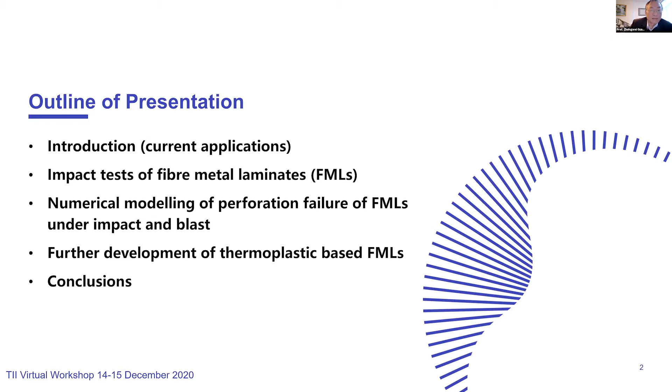So what I'm going to talk about today is the dynamic response of fiber metal laminates subject to extreme loading conditions. First, the outline of my talk: I will give a very brief introduction and include the current applications of fiber metal laminates. Then we'll talk about impact tests. Later, of course, the modeling; I will cover both impact and the blast response of fiber metal laminates. And then a little bit of further development of thermoplastic-based fiber metal laminates. Finally, draw a few conclusions.

Uncertainties nowadays is kind of a buzzword. We have a lot of uncertainties in the current world. We don't know when and where accidents, natural disasters, terrorist attacks will happen. So what we can do is design and manufacture blast and impact resistant materials and structures, and place them in some key locations to protect lives and protect the infrastructure.

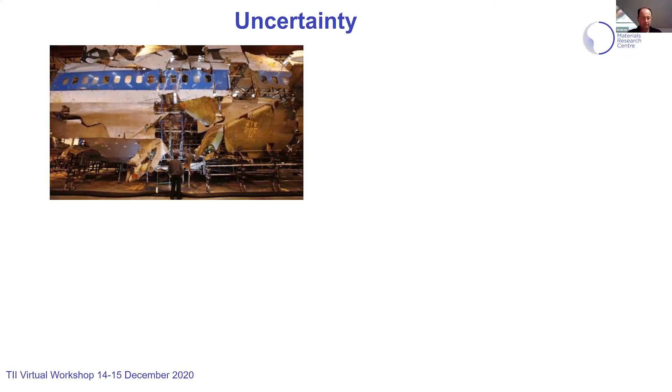So here I show an aircraft back in '88, I think in Scotland. The bomb actually detonated inside the luggage container, which made it crash and killed all people on board and also about 11 people on the ground. So if we can design a luggage container to resist possible explosion, we can actually prevent this kind of disaster. This is a fiber metal laminate luggage container after a blast test. As you can see, it survived.

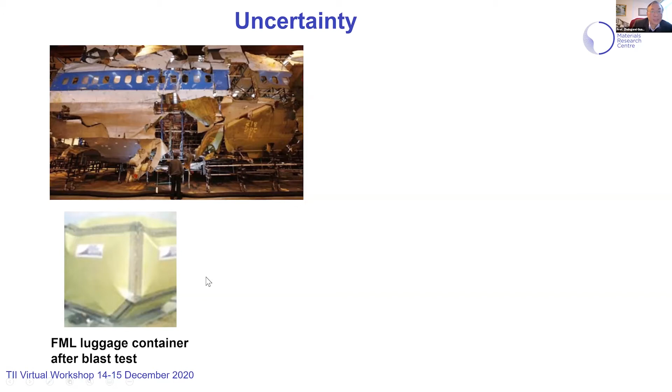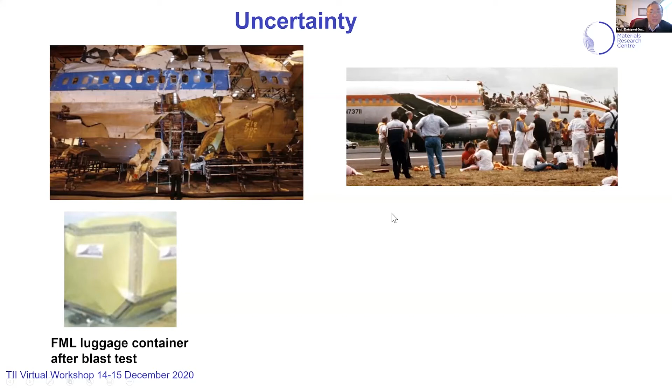And this is a part of fuselage being ripped off during flight. Fortunately, the aircraft landed safely without any major injury. And also this air blast; again, the aircraft survived. But in those key locations we may experience this kind of incident, so we could place impact and blast resistant materials to avoid loss of life and damage to aircraft. This one shows the aircraft wing using fiber metal laminates, so we can have very good impact resistance.

To develop impact and blast resistant materials and structures, usually we do experimental work, and also numerical modeling. Numerical modeling nowadays is very powerful, so we can reduce the number of tests and do a lot of numerical modeling. Once the modeling is validated against the test results, we can use the model to help our design.

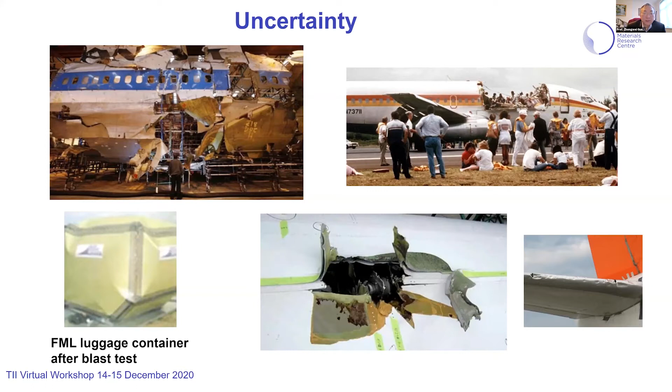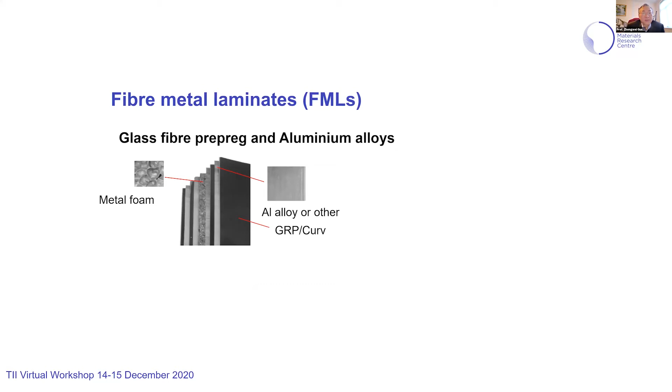So what is fiber metal laminates? It's composite and metal with a certain stacking sequence. For example, here we have two aluminium layers outside, and the middle is a composite layer. This is called 2-1, and then 3-2, with three metal layers and two composite layers, and 4-3. For the composite we can have glass fiber, Kevlar, and carbon fibers, and for the alloys we can have aluminium, steel, titanium. It depends where we're going to use it, but at the moment mainly aluminium is used for aircraft.

Major advantages of fiber metal laminates are very high impact and blast resistance, long fatigue life, good corrosion and fire resistance, and a very low weight to strength ratio. That's why we use fiber metal laminates for aircraft. And the flexible stacking sequence, so we can have different constituent materials and different geometry, mainly the thickness.

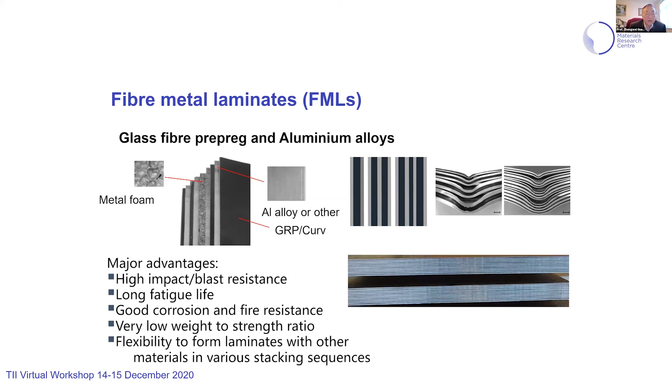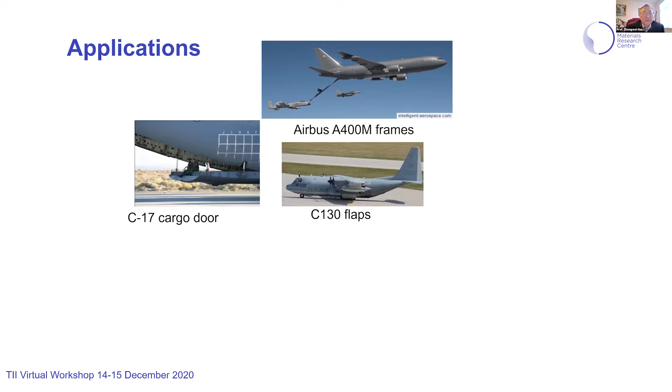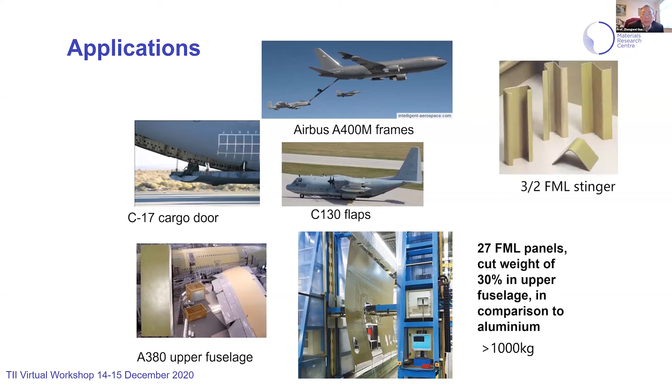Applications. Here I show the C-17 cargo door made from fiber metal laminates; you can imagine the military vehicles drive up and down, so you need very good fatigue resistance and impact resistance. Airbus A400M frames were made from fiber metal laminates, and C-130 flaps. And this is the A380, the largest passenger aircraft in the world. The upper fuselage was made from fiber metal laminates: 27 panels, which cut weight by 30% in the upper fuselage compared to pure aluminium alloys, greater than 1 ton. This is a 3-2 FML stringer.

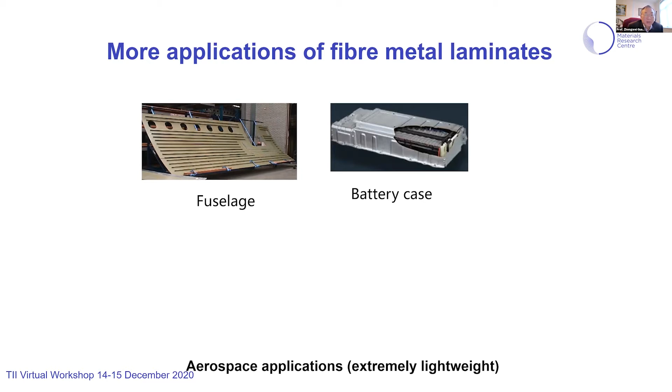Now, fuselage: we use fiber metal laminates. Nowadays Airbus narrow body aircraft use fiber metal laminates. And battery case, mainly for electric car battery cases, we need very good impact protection. I know some company in the UK tries to use fiber metal laminates, and has probably already produced some battery cases. People also use titanium carbon fiber or titanium Kevlar fiber to make fiber metal laminates to protect satellites.

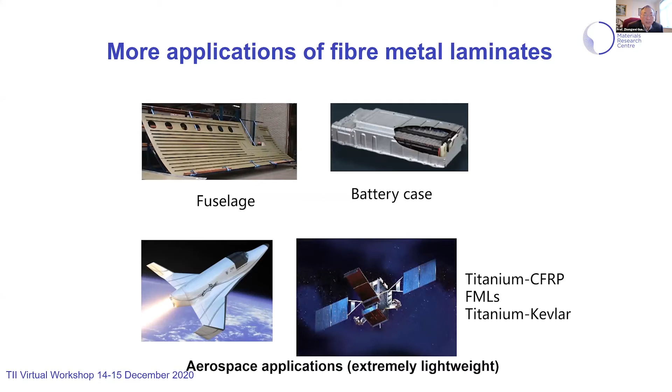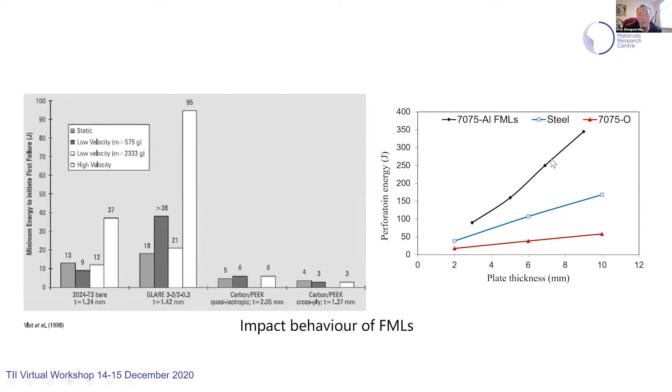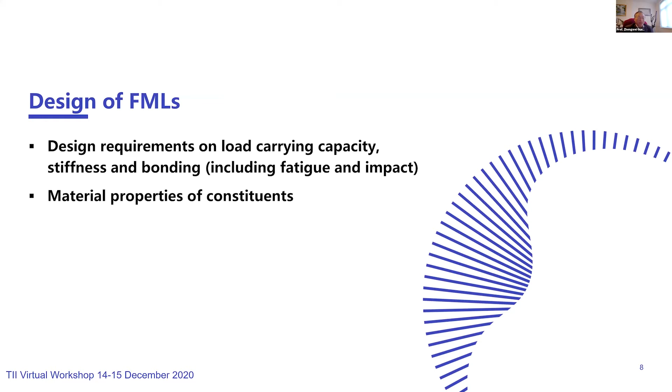Design of fiber metal laminates, of course, has to satisfy load capacity, stiffness, and bonding. This includes fatigue and impact, and the material properties of the constituent materials. You need to design what you are going to use: aluminium alloys, titanium, or for some ground applications steel, and also what kind of fiber reinforced plastic, carbon fiber, Kevlar, or glass fiber.

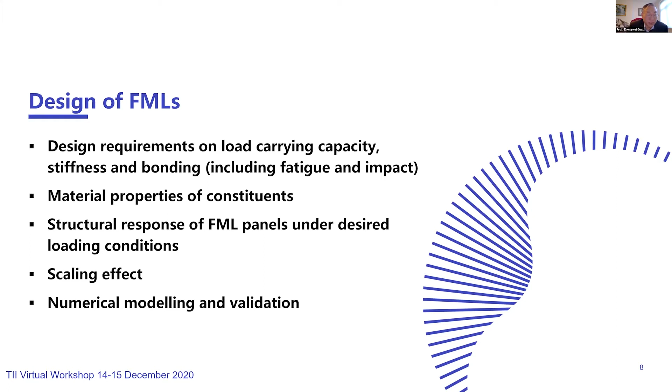Structural response, of course, you have to design under desired loading conditions, and the scaling effect, which Professor Cantwell talked about in detail yesterday, and numerical modeling and validation. This is quite important. Nowadays we have very powerful computers, so we can make use of this power to do a lot of parametric studies to help design. That's why I talk about using a validated model to assist the design of fiber metal laminates.

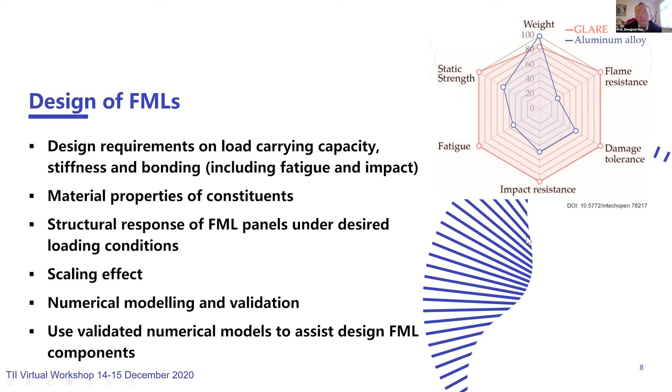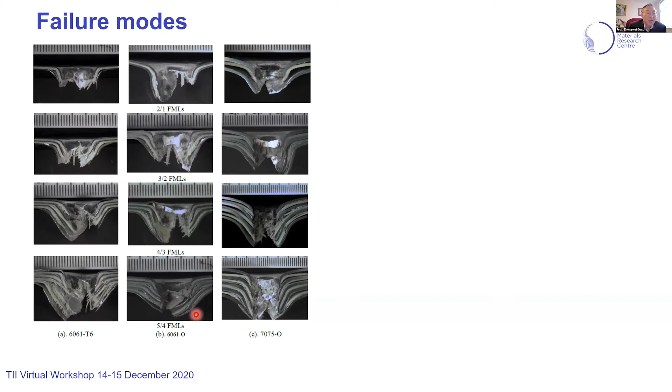Now I am going to talk about some test results. These are different fiber metal laminates: 2/1, 3/2, 4/3, 5/4, and 3 different aluminium alloys. They have similar failure modes. This is projectile impact with different stacking sequences. The primary feature is delamination between the metal layers and the composite layers, and we have cracks, of course. This shows the front face and back face of 3/2 fiber metal laminates, and also 5/4 configurations.

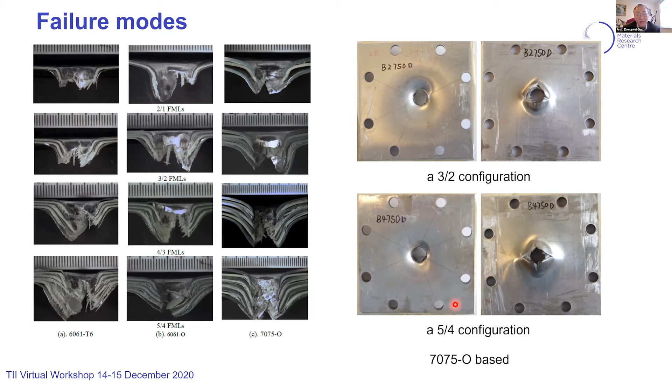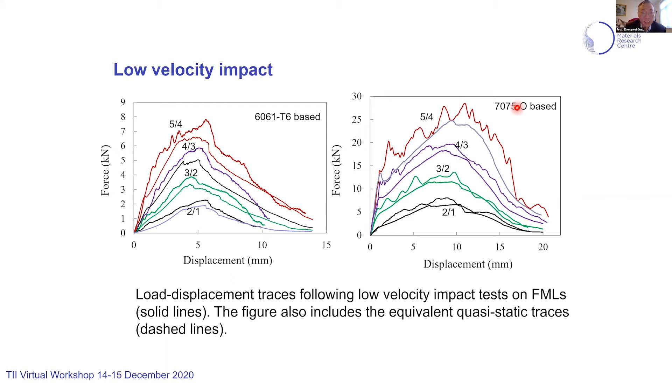This is high velocity impact, close to 100 meters per second. We have DIC recording the back face displacement field at different times. We can see the impact event starts, reaches a peak, and then bounces back. This one is not fully perforated.

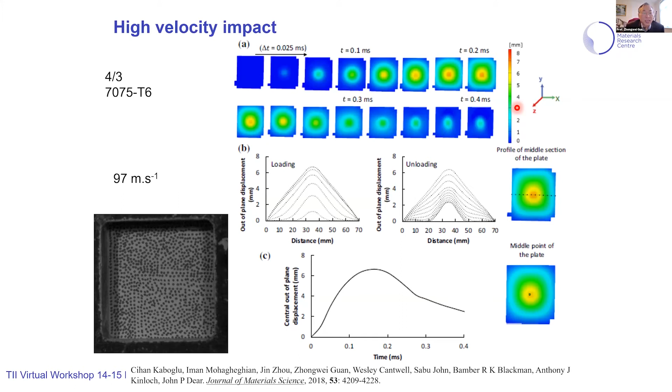Now I'm going to talk a little bit about titanium-based fiber metal laminates. We have surface treatment using a laser. Titanium surface treatment is quite important. You cannot use standard blasting or even chemical etching; that's not good enough. So here we use different laser fluences, 1 to 5. Number 3, with a laser fluence of 4.54 joules per square centimeter, gives us the highest shear strength, so the highest bonding, and this is the roughness.

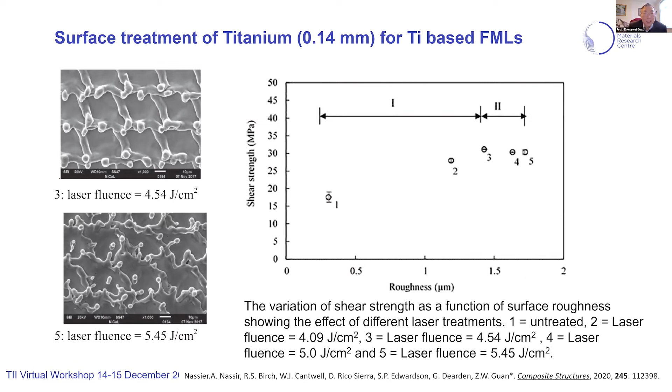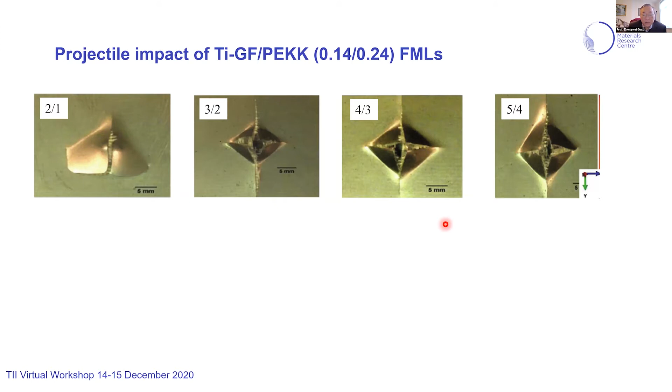These are the test results. The back face from 2/1 to 5/4 shows pretty similar failure modes, but of course different thickness. This is load displacement for the 4 fiber metal laminates: from the beginning it reaches the peak and then perforation starts, and the projectile perforates gradually to full perforation. And this is the perforation energy against the different stacking sequences from 2/1 to 5/4.

And this is a comparison between aluminium-based and titanium-based fiber metal laminates. The specific energy absorption is just perforation energy divided by areal density. We can see aluminium-based fiber metal laminates have higher specific energy absorption. The reason behind this, of course, is that aluminium alloys have much higher ductility, and titanium is relatively brittle.

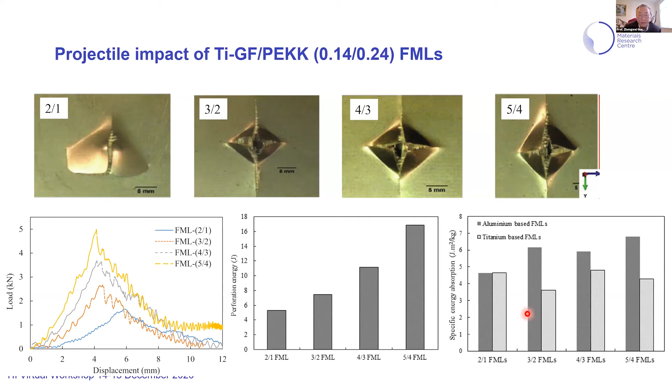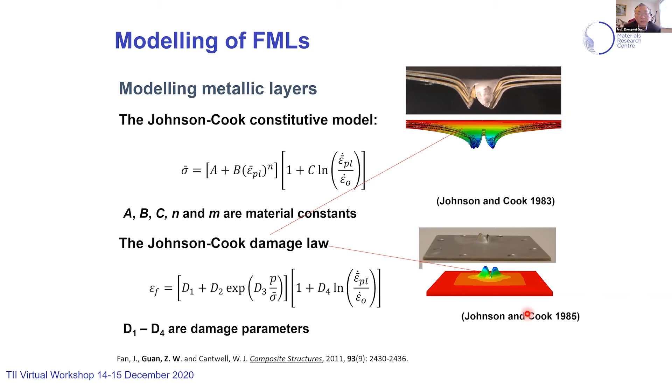Now I'm going to talk about the modeling. So for modeling fiber metal laminates, we have to model individual constituent materials. To model aluminum layers or metallic layers is very simple. You just use a Johnson-Cook constitutive model and the damage law, so I don't need to spend much time talking about that. Mainly I will talk a little bit more about the modeling of composite laminates.

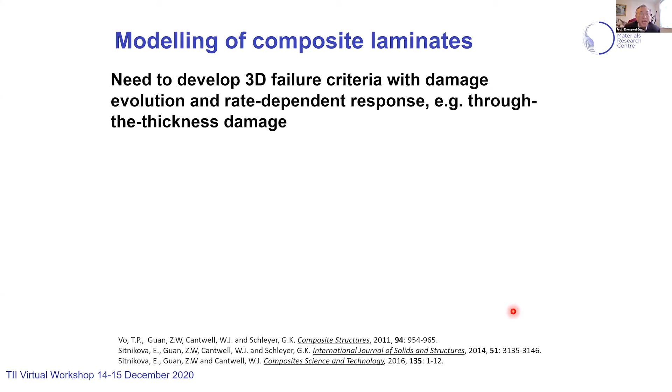In commercial code, you have 2D Hashin criteria. And if you use LS-DYNA, you may have 3D failure criteria, but they don't have control over the damage evolution or rate dependence. So we have to develop a user-defined subroutine. Especially for impact and blast, through-the-thickness damage is very important.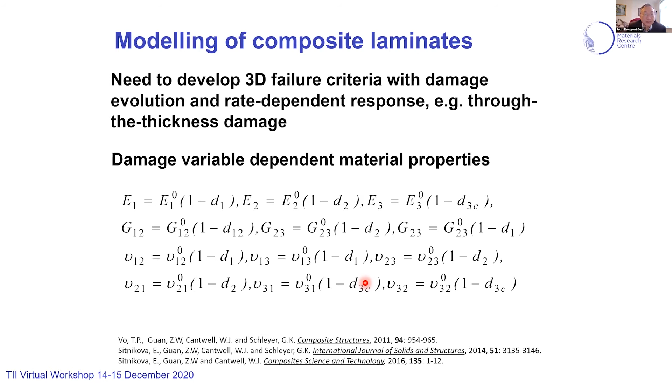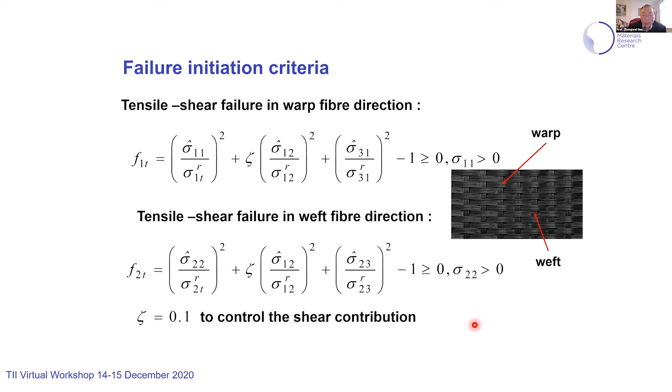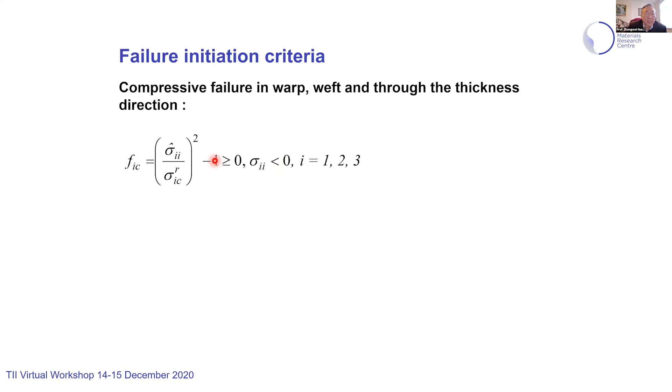This failure criteria covers tensile and shear failure in the warp direction and also in the weft direction. That is a typical woven composite. We use this damage criteria through the warp, weft, and thickness directions. So that's the failure criteria we use.

And this is strain rate dependency. Here we have sigma superscript S, that is the quasi-static strength. Inside the brackets, we have some enhancement due to strain rate. The reference strain rate is 1 per second, but the current strain rate from impact or blast is variable. You can have maybe 100 per second to tens of thousands per second. So you can see this is quite a large enhancement. If you don't consider rate dependence, you wouldn't be able to simulate especially blast response.

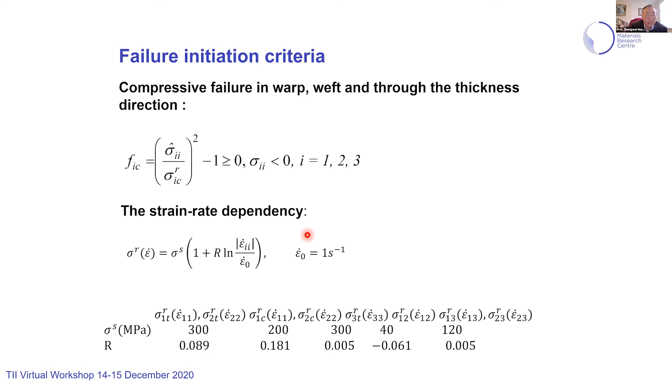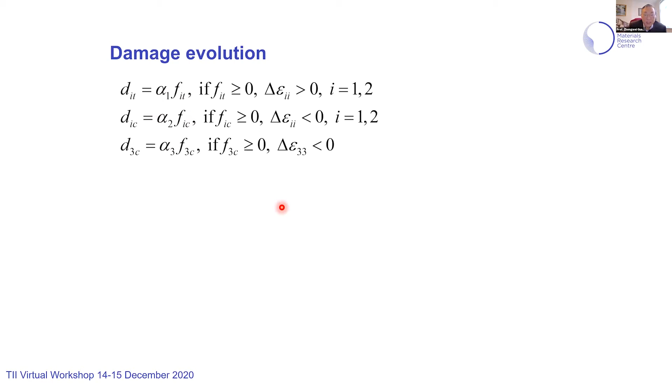This is some material parameters we use for those quasi-static strengths and also R, this coefficient. Then the damage evolution: we have damage failure criteria, and we also introduce alpha 1 to 3. In our modeling, we use alpha 1 equal to 0.2, alpha 2 equal to 2, and alpha 3 equal to 1. But we also did a test using alpha 1 to 3 all equal to 0, and we have this kind of blast failure mode. And if we use alpha 1 equal to 0.2, but alpha 2 and alpha 3 equal to 0, we have this failure mode, which is much closer to the real blast failure mode.

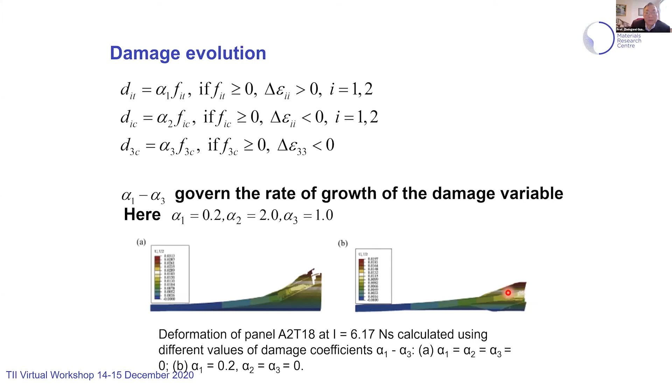I haven't mentioned the interaction. Of course, you have to define the interaction between aluminum and composite, and you could also define an interaction between plies.

So this is the modeling results. We have the broken line from numerical modeling and the solid line from test. We can say we have achieved pretty good correlation. This is for two aluminum alloy based fiber metal laminates. So very good correlation, from 2/1 to 5/4.

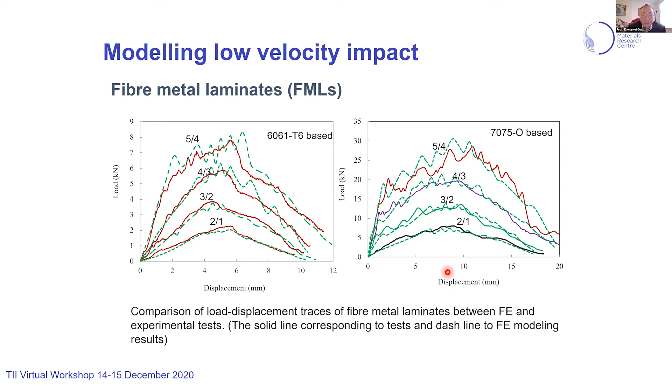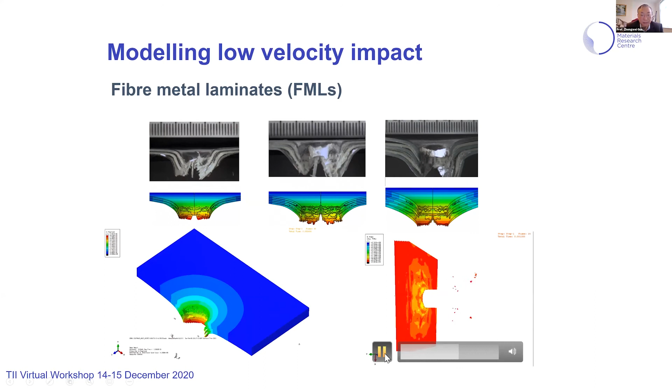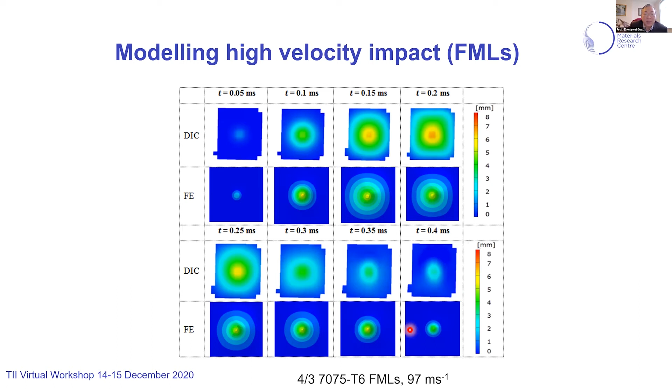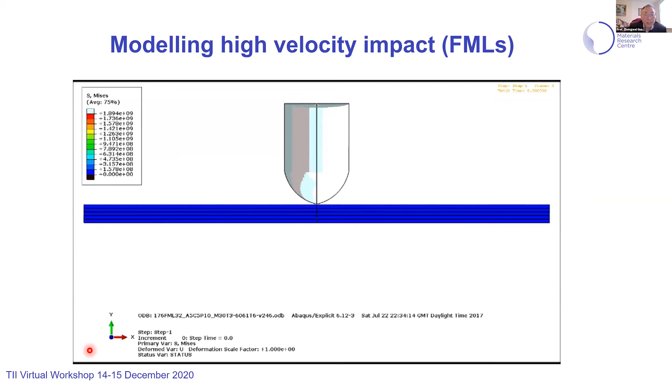This modeling shows different impact velocities. With high impact velocity, we get full perforation; with the lower one we get just perforated; and at lower velocity the projectile actually bounces back. So 246 is fully perforated, around 180 meters per second is just perforated, and 75 is not perforated, so it bounces back.

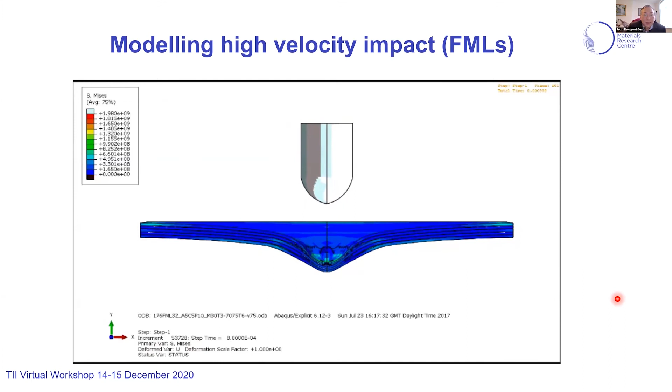Now this is a cross-section comparison for different impact velocities and different aluminum alloy based fiber metal laminates. This is the central cross-section failure mode, and the comparison on the right is the FE simulation. We can say the failure modes are pretty well simulated.

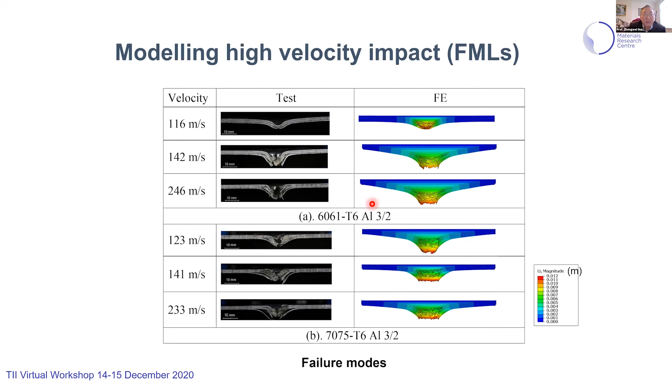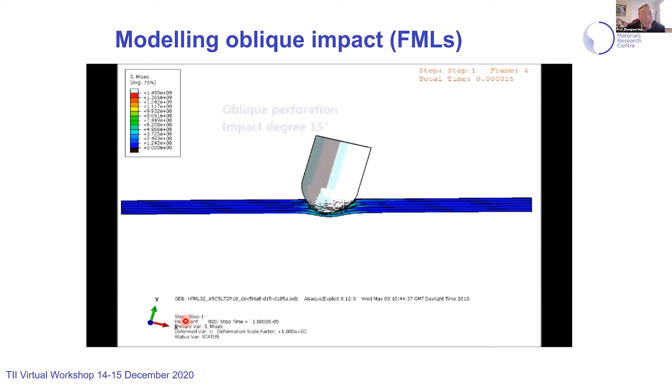Once the model is validated against test results, we can use the validated model to do oblique impact. Here I show different angles. The angle is counted from the normal direction, turning clockwise. The first one is a 15-degree oblique impact, and the second one is 30-degree.

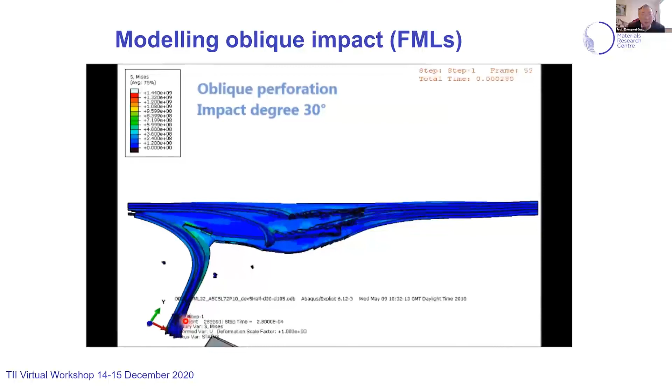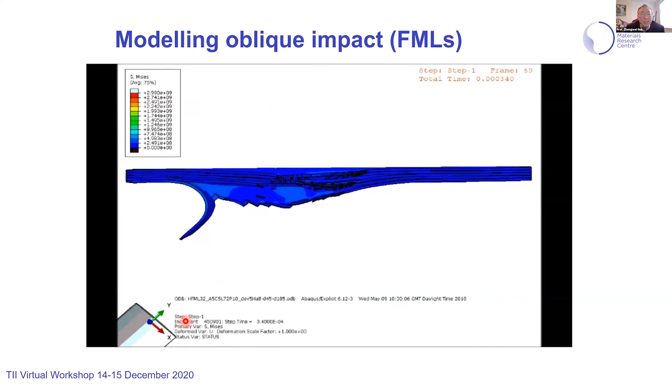And then we have 45-degree, and the final one is 60-degree, so this is very shallow. So if you get lower than that, or higher than that, you get a problem. You cannot get fully perforated.

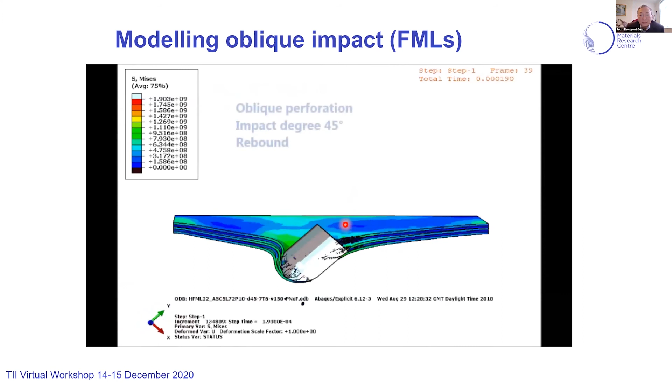Now these are the modeling results on titanium-based fiber metal laminates. This is titanium glass fiber, S2 glass fiber, PEKK composite. So this glass fiber PEKK prepreg was actually produced in-house, by our students, who made this fiber and made this prepreg. So we have very good correlation between test and the modeling.

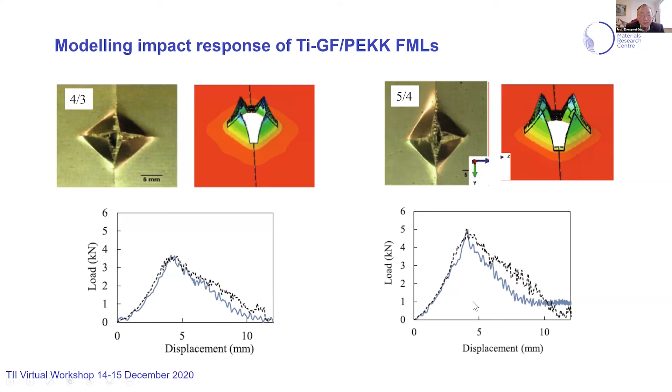So the load displacement also is quite well simulated. This is 5-4 and 4-3. Both show a good correlation in failure mode and also load against displacement. So failure mode is kind of a qualitative validation, and the load displacement is a quantitative validation.

Now is the modeling blast response. On the left is from simulation, from modeling, and on the right from testing. So this kind of damage feature is being captured. We have very large deformation for aluminum, so it rotates, and also there are cracks - I mean the brittle splitting fiber from the composite.

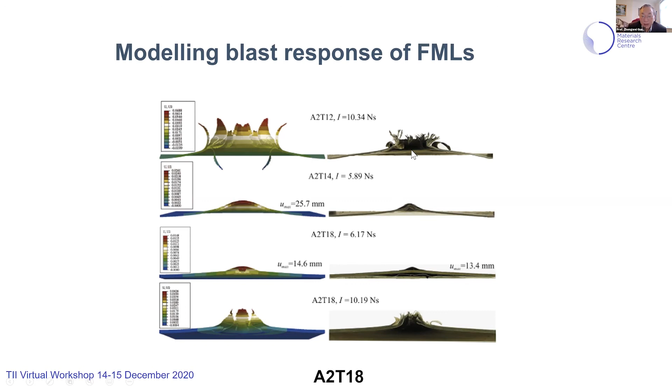So this animation shows the simulation of blast - this is the 2-1. So you get this kind of simulation, capturing kind of a real situation.

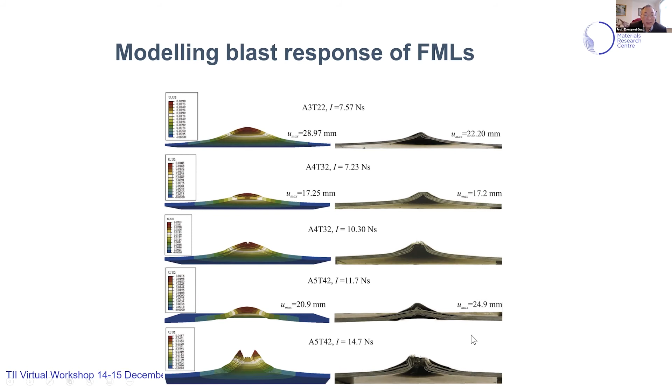Now if we increase the thickness of the fiber metal laminates, from 3-2, 4-3, to 5-4, you see that we have quite a different failure mode. 5-4 is like a puncture failure because of the relatively thick fiber metal laminate, and we have a higher explosive mass. This animation again shows this failure simulation - you can see it's relatively localized perforation failure.

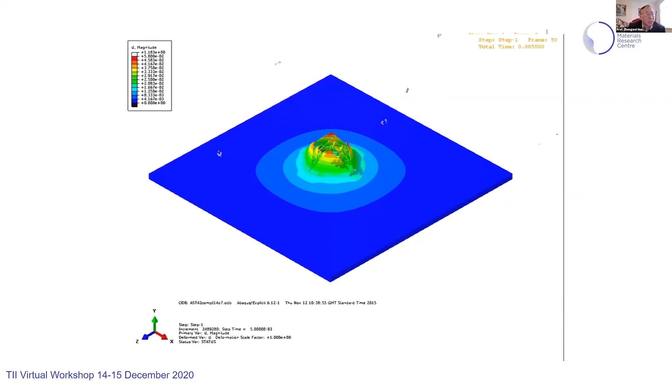Now I'm going to give a summary. So fiber metal laminates have been introduced with their advantages, applications, and design issues. Then we covered perforation failure of fiber metal laminates subjected to projectile impact, supported by many tests. And then 3D Hashin failure criteria together with rate dependency and damage evolution have been implemented in Abaqus Explicit through VUMAT. The failure features of fiber metal laminates have been captured for both impact and blast response. So the models developed are ready to be used for further parametric studies to assist the design of impact and blast resistant fiber metal laminates.

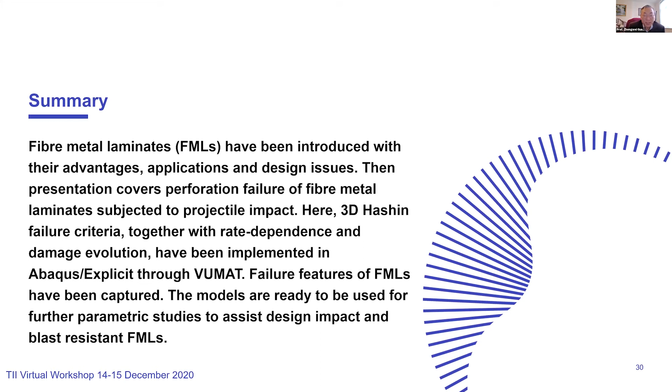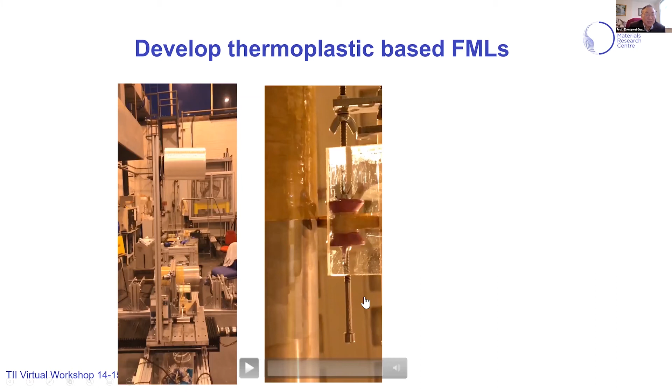So next, this final bit is about thermoplastics. We have an in-house manufacturing rig to produce glass fiber, PEK or PEKK prepregs - this kind of thermoplastic prepreg. Thermoplastic is increasingly becoming popular because thermoplastic prepreg has unlimited shelf life, and you can remelt and reshape it. That's why we can use thermoplastic-based fiber metal laminates to reshape - we can produce a flat sheet, and then we have a mold so we can reshape it. That's the whole point of this kind of thermoplastic-based material.

This is the glass fiber, S2 glass fiber prepreg we produced. This is the carbon fiber prepreg. We also add different nanomaterials inside, so we can play with the ingredients. That's a redeformed fiber metal laminate that we are going to develop.

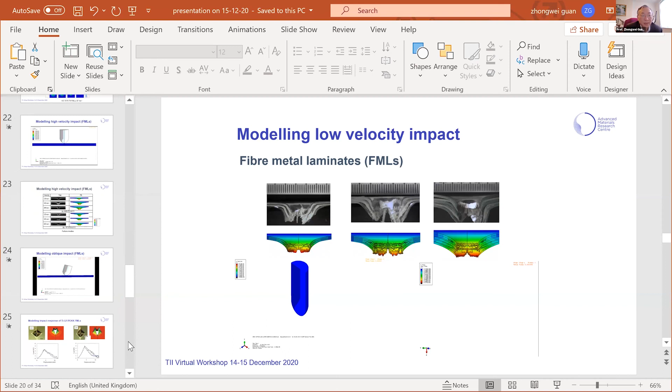I'm just wondering about the damage, because once, for example, you've got the damage, when you reverse it - I noted the thermoplastic is a kind of reversible material, but what about the fibers, what about even the metals? Did you work on something in this direction? Have you seen something in terms of evaluating the damage when the deformation is reversed, this kind of reshaping?

So what kind of temperature you apply is very crucial. You cannot apply very high temperature because the resin will melt, and you cannot apply very low temperature because the resistance to reshaping will be very high. This needs thorough research, that could be our future research area.

Reshapable thermoplastic is something we're expecting to explore in the future, because I'm wondering about the residual damage that happens when you reverse, whether the behavior is about the same. That needs proper research.

When you do the reshape, you're going to have some spring back. For the mold design, you need to predict how much spring back, so you can accommodate that in your mold design.